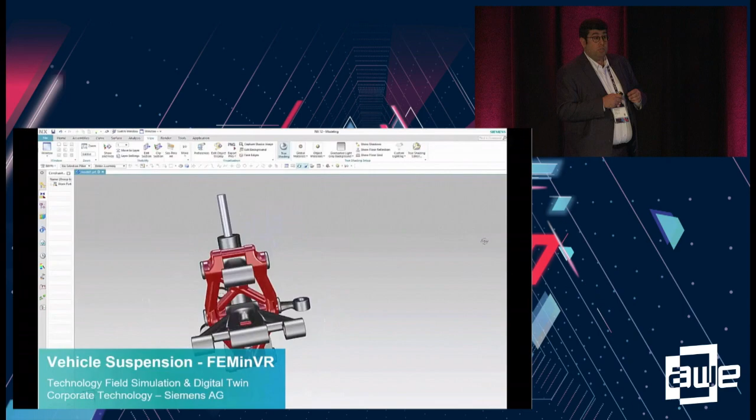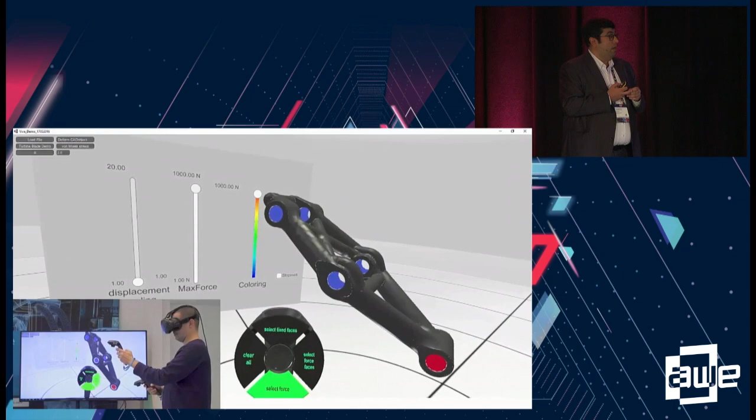The first one is called FEM in VR, where you can perform finite element analysis in the virtual world really fast, without having any knowledge, and get interactive feedback for your actions. It's part of our bigger design concept in VR. I'll go into details later about how it works. As you can see, everything performs in real time.

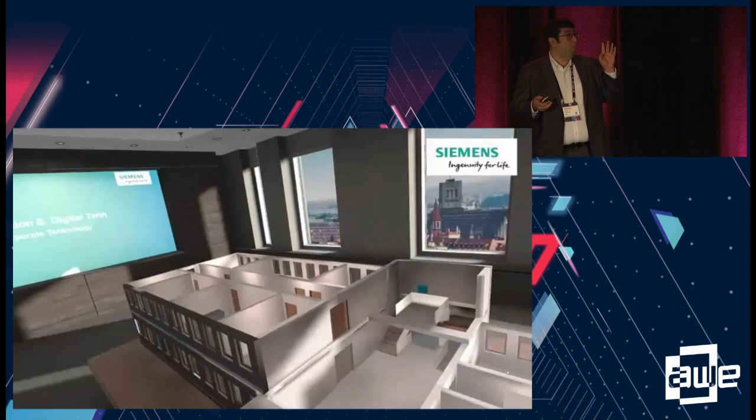Then we have another example for the design phase, with virtual planning of blowers in buildings. This is an application designed for architects. When they design a building, they can perform CFD, computational fluid dynamic simulation, without having any knowledge, and capture phenomena. In this case, they can place a smoke source in the building and interactively see how the smoke will propagate, taking appropriate countermeasures at an early phase. Such projects could become very useful here in Germany, especially. We have some bad examples of big projects like the Stuttgart 21 train station, where they found out later, after constructing, that they placed the exit doors at the wrong place.

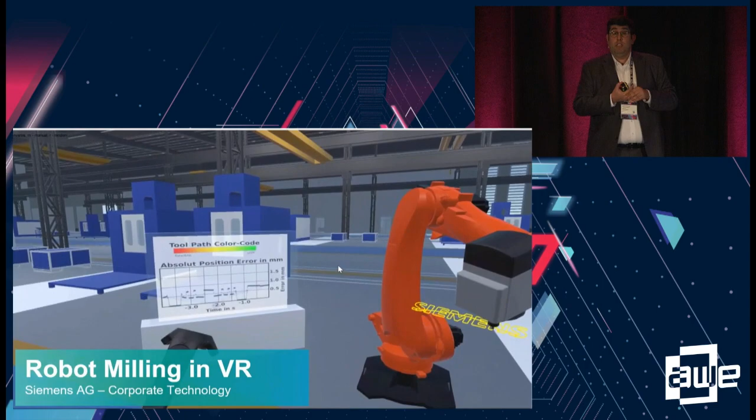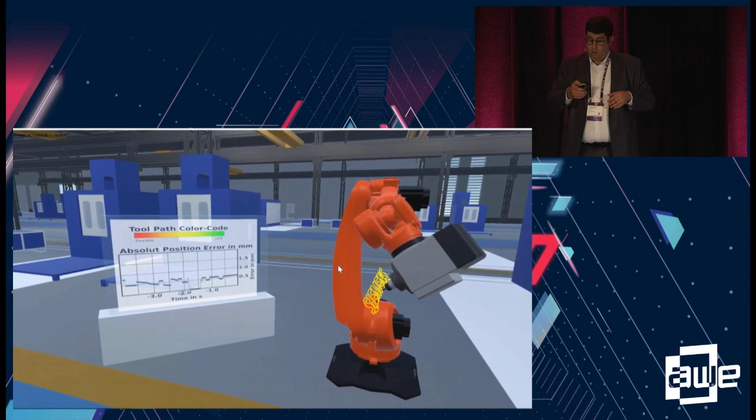Then we have examples from production and planning. Here, for example, is a robot milling case - we want to enable robots to perform manufacturing processes, but robots are not accurate because of stiffness issues. In this example, the user can interactively place the object in the 3D room and get feedback on the quality of the milling process. You can see the error on the diagram and the stiffness of the robot, so interactively he can figure out the best position to place his object for robot milling.

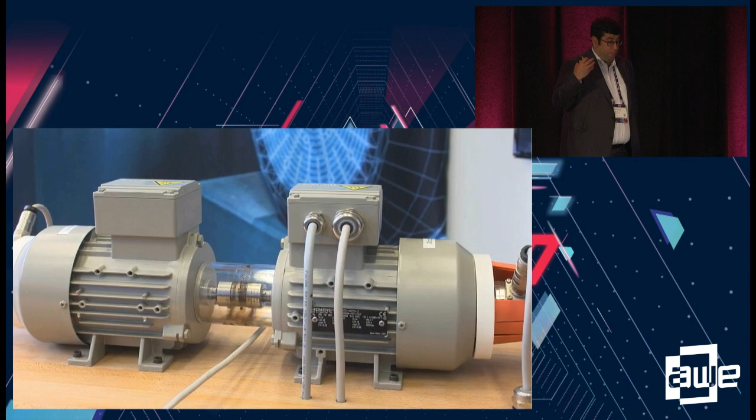Then we move to the operational phase. Dirk and I presented this demo last year, where we managed to visualize in real-time the 3D geometry of a motor. We took really detailed 3D engineering models, applied mathematical algorithms, and reduced these models to perform in real-time. With the help of our neighboring department, we're visualizing everything with the HoloLens in real-time, and here you can get information like the temperature of the motor at any location inside, without having any sensor.

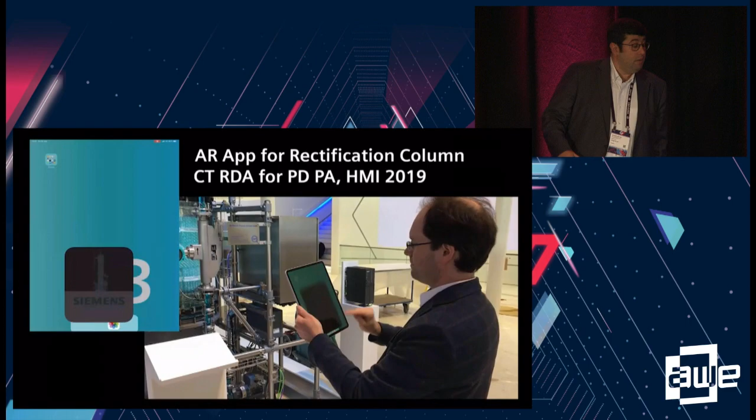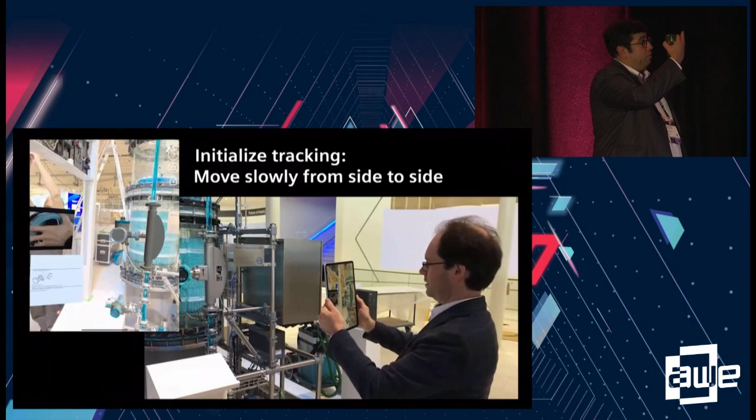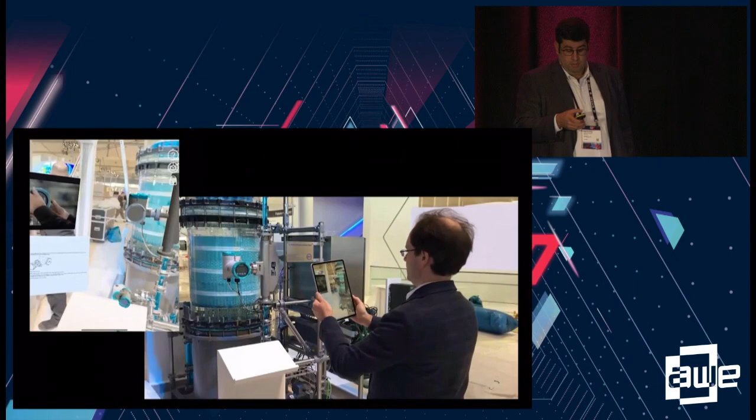Another example is from the Hanover Trade Fair, one of the highlights of Siemens during last April's Hanover Trade Fair. This is for the process industries, where we have an application that overlays information on the real object. When you go closer to the object with your iPad, you can see it exploded to show what's inside this part, and get information about it. We also have videos with technical details on how to perform maintenance - for example, how to change the screen on this equipment. As you move around the object, you can get more information, such as key indicators or P&ID diagrams, and if you look upward, you can see sensor data.

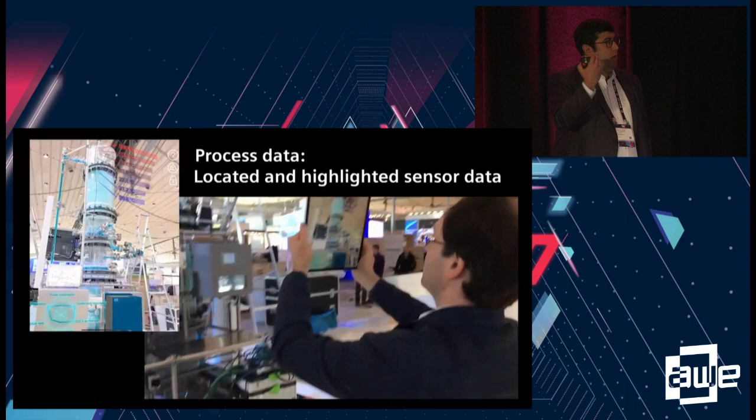The sensor data in this application are not real-time, they're installed in the app, because real-time internet at trade fairs is a little bit tricky always.

And finally, for the services, that's our brand new training platform. It's called Vorena, completely developed by Siemens. It's a training platform where you can manage all your trainings, access all the trainings, edit them, remove steps, add steps to this training, and of course generate your own new training thanks to our VR authoring tool that we have integrated there.

You don't have to program anything, but all the tasks are monitored during the VR interactions. And in this VR authoring, you can add videos or annotations that are kept there for the next people who are going to carry out the training.

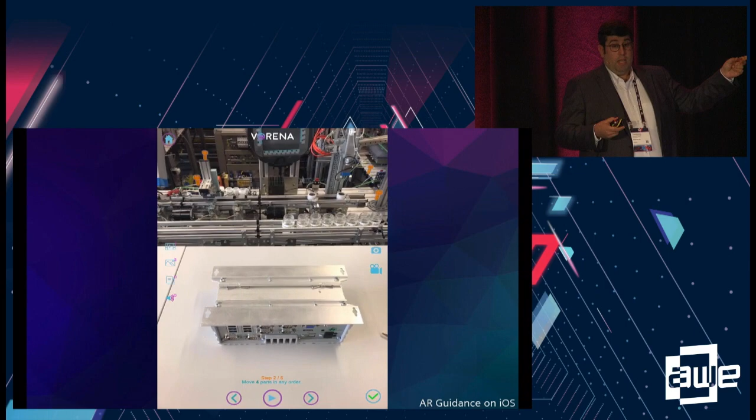And what's great about this platform is that all the steps from the VR training or the authoring can be exported for AR guidance on iOS, as you see in this example. So you don't have to program again the training for the field technicians. You do that only once.

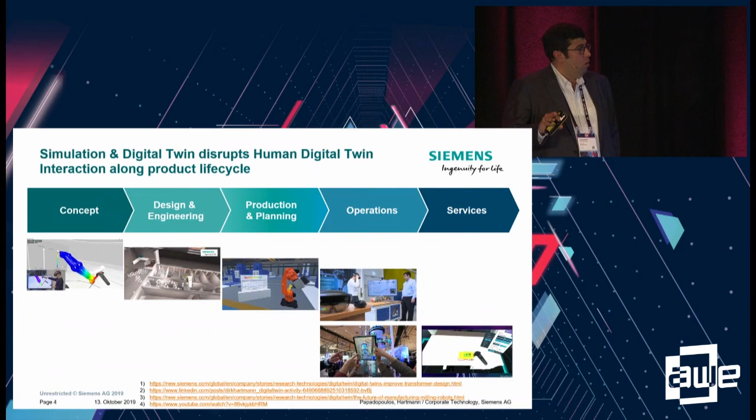But that's all with our work. And let's go now to our topic today. So why we are here today, we're going to discuss that today.

Market trends require new disruptive methods, especially in the early concept phase. Why is that? Because now the time to market for the project is shorter, and the customers want novel, innovative products. As you can see here, that's an example from Topology Optimization. But we lack experts in the pre-development phase because the experts are engaged at the later stage.

So let's go in more details. Why about the pre-development phase? Why are we targeting this phase? Because now this phase is the main bottleneck of the completed product development. 80% of the costs occur during the early design phase of the product.

And why is that? Here's an example of how it works now, this iterative method. In my company, for example, it's quite common that different experts are distributed around the world. For example, we have a designer in the US and experts in Europe, China, and India. So what happens now in the early design phase, the designer makes a new design, and he sends the design

to the experts to evaluate their properties. And each of these experts carries out some simulation for his field of expertise, then sends back to the designer his feedback. So we have pure silo development. Nobody knows what the other is doing, but all of them are strongly dependent on each other. And that's not efficient, and we don't have an optimal allocation of resources, because the designer waits till he gets feedback from the others, and the others from the designer. So it's not so effective, and we want to change that.

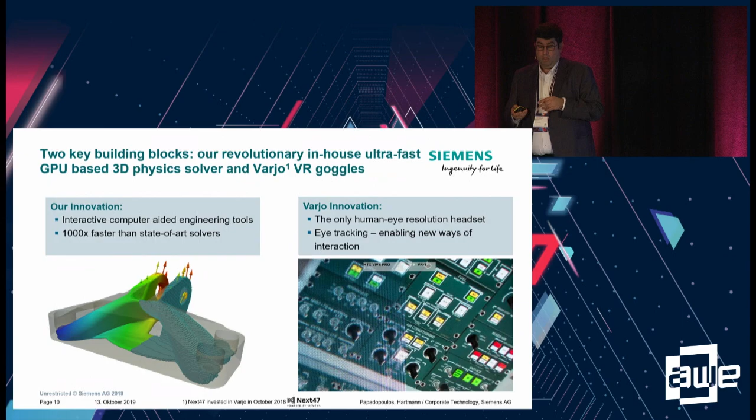How does it work? We call it CAD in VR internally. All the basic functionalities are on your controller, and by swiping the pad left and right, you can access them—from predefined primitive objects to functionalities like import and export of geometry. But let's see how it works with an example.

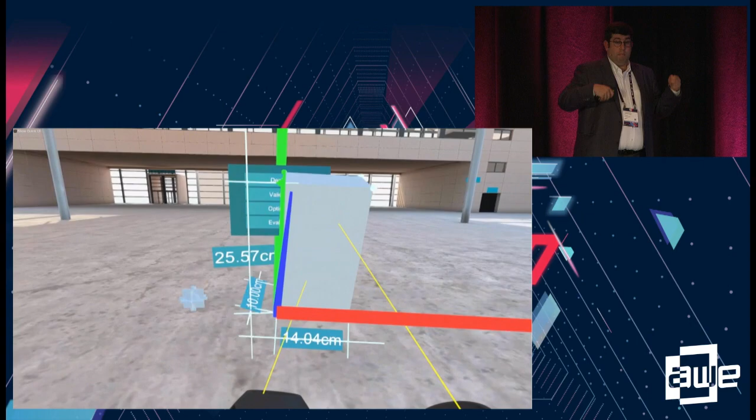We select a box with another controller. The box is created in the virtual world, and with the two controllers you can adjust the dimensions really fast without having to type anything. You place the 3D object in the room, then repeat that for other primitives—for example, here a cylinder. Why a cylinder? Because I want to make a hole, and I want to show you how to do that really fast.

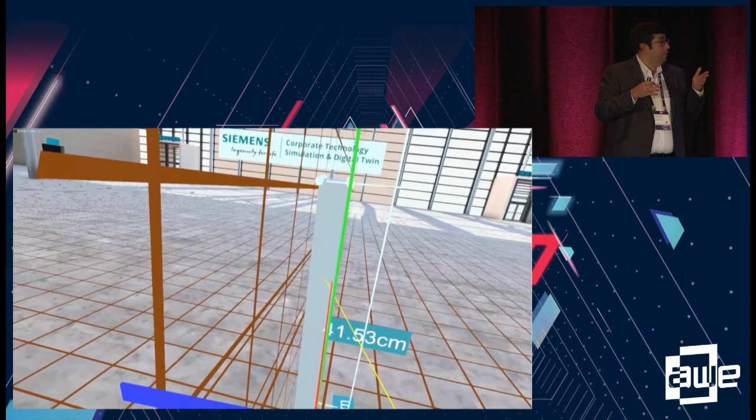What's new here is that we've integrated a virtual grid, as you can see, because perspective in the 3D world is really difficult, so we can't align objects perfectly by eye. But thanks to this 3D virtual grid, we can align the objects much better.

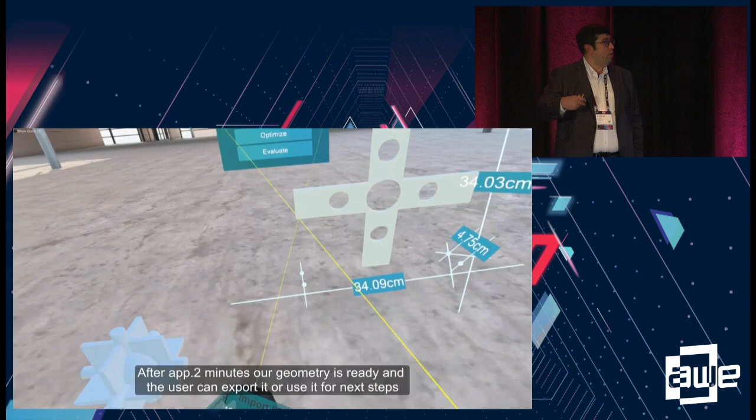For example, here we put the cylinder into the object, and now we want to subtract it. We select both of them and perform this Boolean function really fast—it's called 'cut', so we remove one object from the other, and just like that we have a hole in our object. Anyone can do that—you don't need any expertise. If you repeat it multiple times, you end up with this design.

When you're done, you can either export the design for another tool, or go to the next step, which is design testing—where you can interactively evaluate your design without having to use a complex CAE tool.

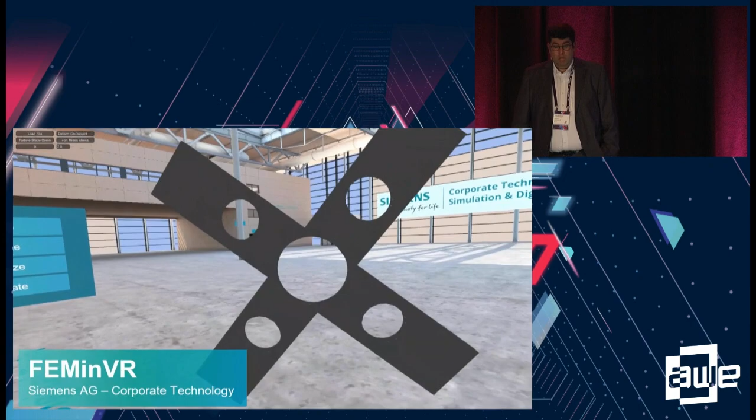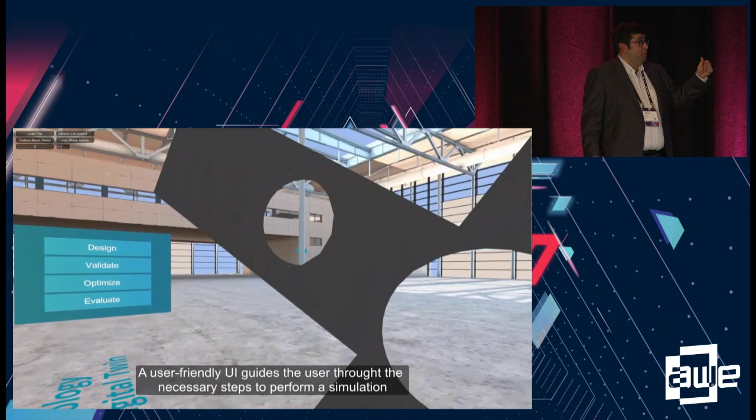Here, for example, this is a finite element example. You can scale your model up and down, make it a little bit bigger. Again, all the information you need is on the touchpad. You just select where it's fixed—here, these small holes. I made it bigger to make the selection of the holes easier.

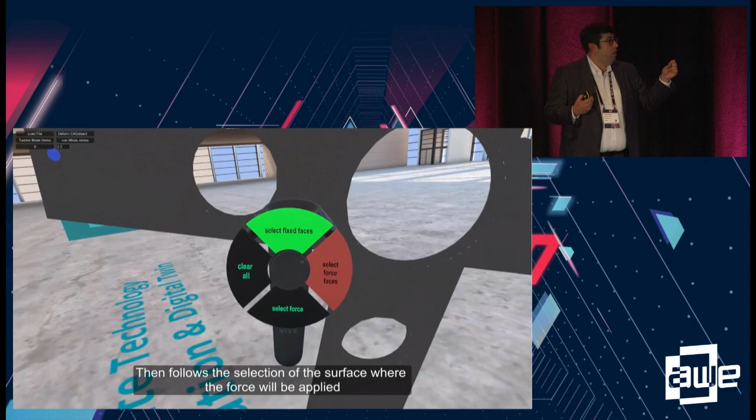So we say that's where it's fixed, because the screws will go there later—really fast. Then we say where we want to apply the force. Again, with the controller, we change the menu, now select where the force will be applied, and select the surface there.

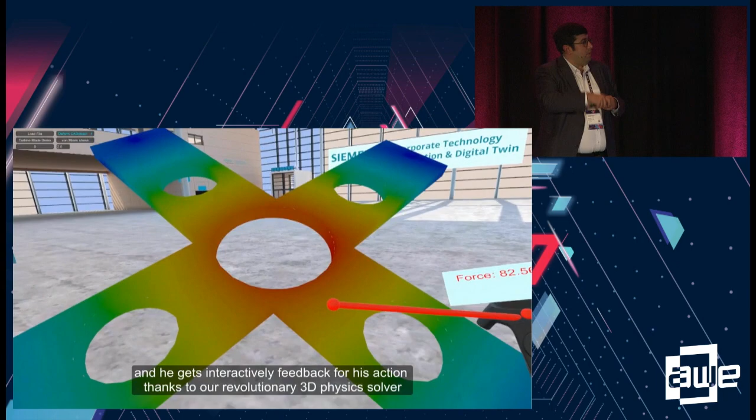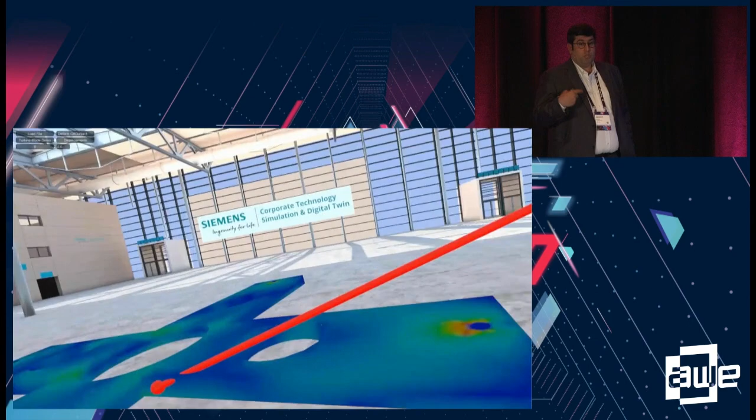By selecting the force, you're now done—go to the last option and apply the force. Just take your controller, and by clicking the trigger button, you can define the magnitude and vector of your force and get the result instantly—that's the deformation here. As you can see, as I move it around, the coloring changes, so everything is real time. You can read the values thanks to a virtual pointer we've integrated, or switch to stresses to find the critical spots of your geometry. If you're satisfied with this first result you can proceed further, or go back and improve your design.

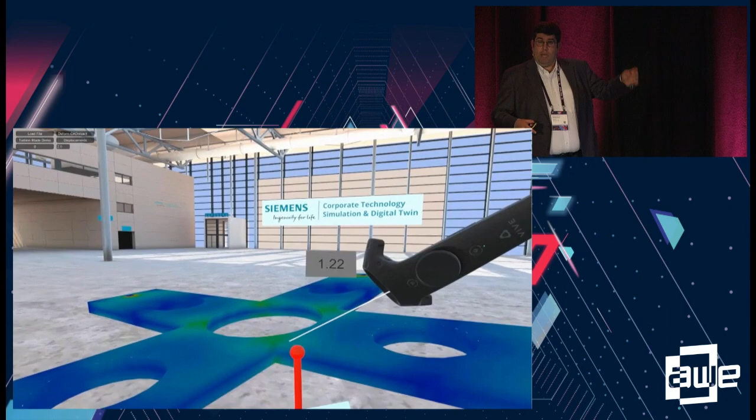Now, because everything is coarse in the VR, it's not optimized, and it's really fast, we have integrated the next step to help you. That's a design optimization. We have integrated a topology optimization algorithm in the virtual world, which improves your model.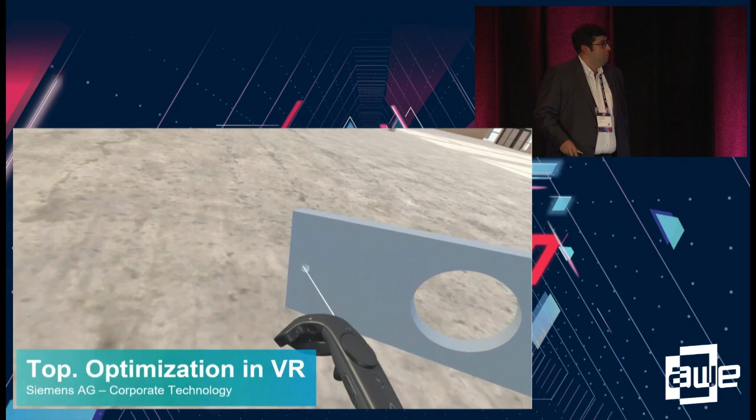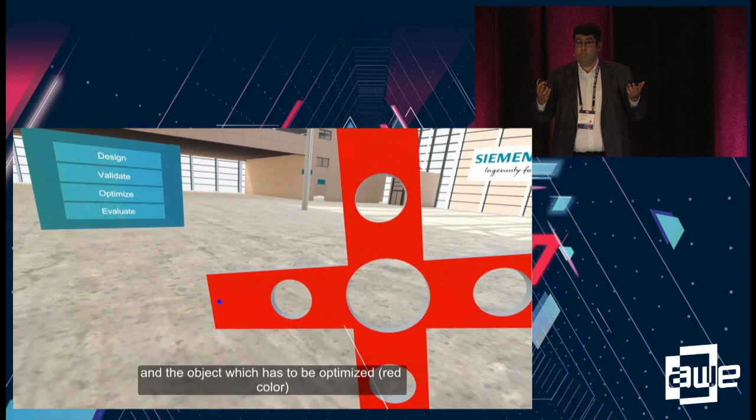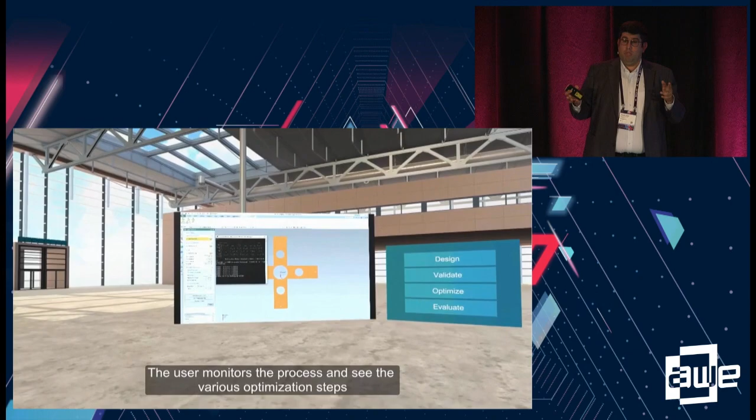So again, same as before, you select which areas should remain kept, like the blue ones. We don't want to change them because these holes will be used for the screws later, and we want to optimize the whole geometry. Then by clicking optimize, we trigger the topology optimization, which runs externally from this VR world. It's a Siemens tool called Siemens NX.

But the user gets feedback on a monitor of how the process evolves over time. Here you can see how the geometry evolves during the topology optimization. In this case, it took us 15 seconds to have an optimized geometry.

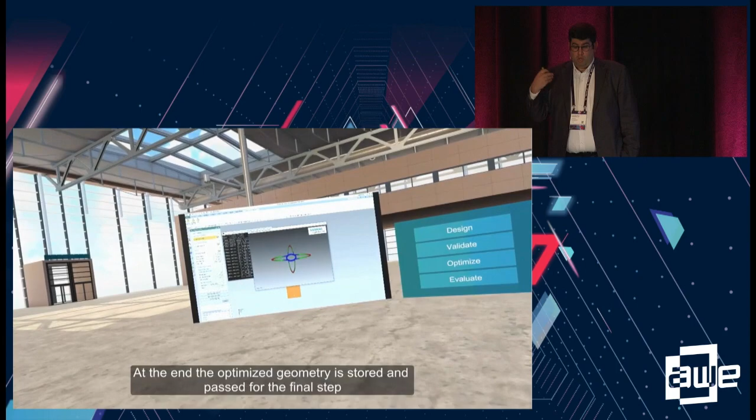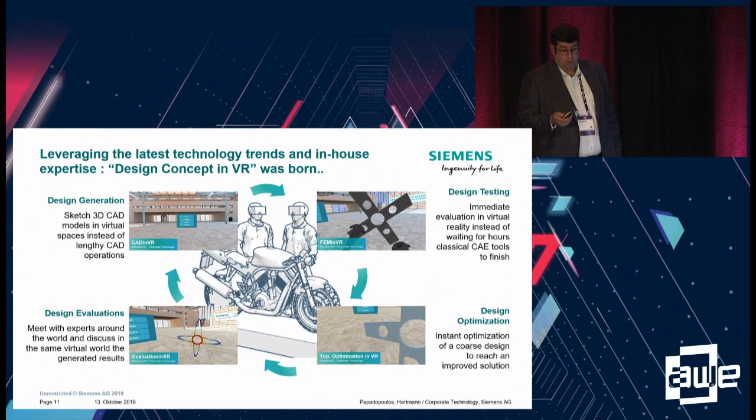And when the geometry is optimized, it's automatically stored in the system, and you can use it for the final step, which is the design evaluation. What's the design evaluation? Here it's evaluation in XR because it's cross-platform. We can use this evaluation with all the types of VR and AR hardware we have tested so far, with the Varjo, HTC Vive, Oculus, Android, and iOS devices.

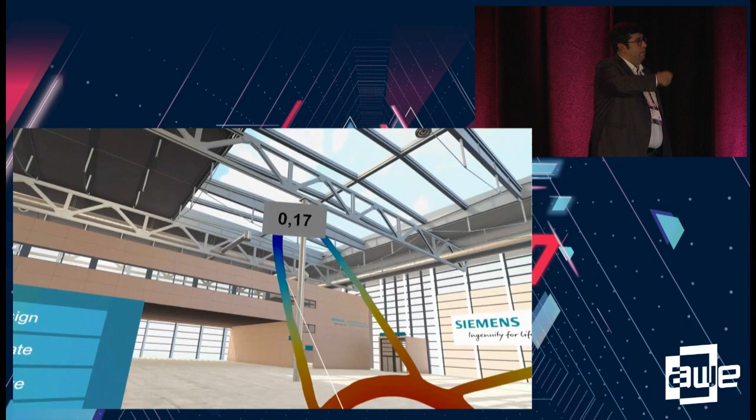So here, the R&D member can investigate the results of the topology optimization. If you remember before, it was 2.2, the deformation. Now, after the topology optimization, it's only 0.17. So you can see that's improved.

And he can leave some annotations there for some results. And if he's not sure about the results, he can call an expert and meet in this virtual world. With a tablet there, that's Dirk in the US, I'm in Munich, and we discuss the results. I leave some annotation there and ask him, what do you think about here? And it goes the other way around.

He can go with the tablet around this geometry and place his tags, and in this way, we can discuss the results and arrive at an improved design really fast. So we also improve the relationship between the team members and make communication effective.

But you may say this is only a concept - how is it in real life? We have carried out some preliminary studies. We asked 19 persons to carry out a certain task, to construct a predefined geometry. And we asked them to do that with two different tools.

One is the open source FreeCAD tool, which can construct geometries, and the other is our concept, the CADinVR part. They had only 20 minutes to realize that. What we figured out, which was astonishing for us, is that 90% of the people managed to realize all the steps and complete the geometry using our tool, whereas with the open source program only 25% of them managed to realize that. For the open source tool we provided them some instructions on where to find the basic functionalities.

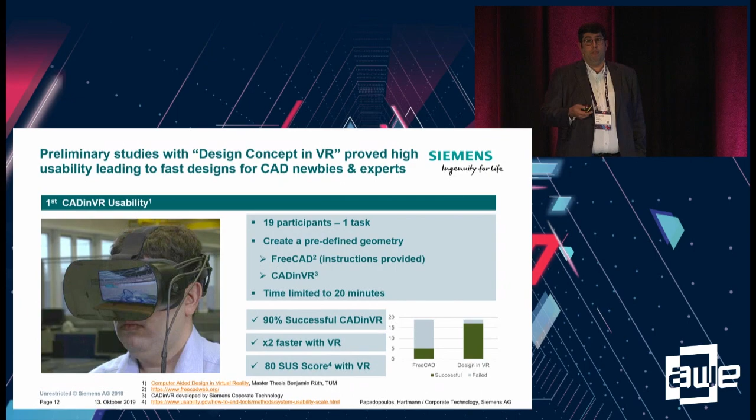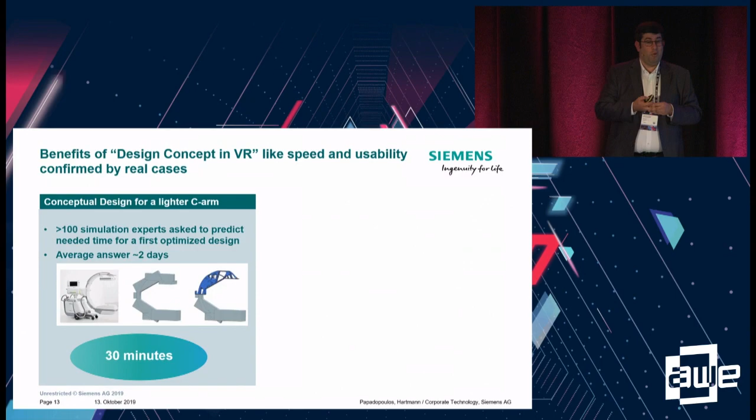And the previous result that you saw before is a design for a real experimental facility - a support construction for sensors which we mounted on our electric motors. A typical workflow for that would be half a day of work, going to the design tool and evaluating everything. With our simulation concept, it took only 5 minutes to realize that.

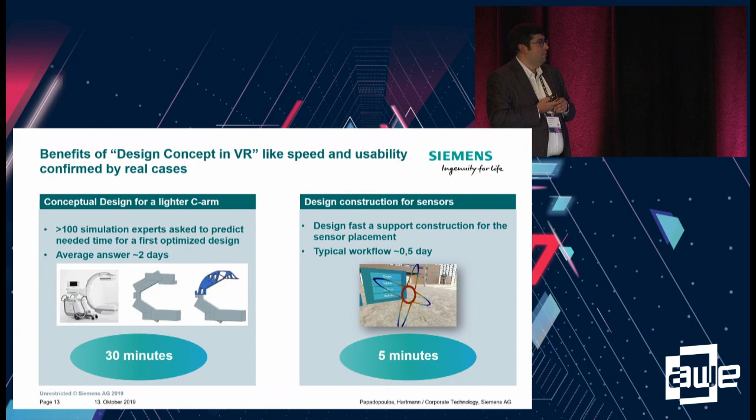Before closing, I have to give credit to the whole team because it's not my personal work. It's more than a 2 year project, as I said, and multiple persons have worked with me, and the credit should go to them for their help.